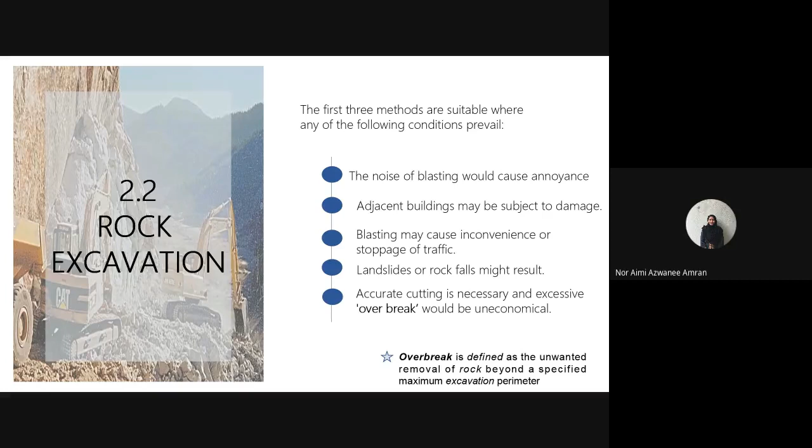So today we'll be continuing on the topic of earthworks. Inshallah, this will be the second part of the presentation. However, as I mentioned earlier, the slides here are not really up to my liking because they tend to oversimplify things. However, I will try to explain to you the best that I can in regards to the topics.

So that's why when you are studying for your examination, assessment and whatnot, you do not want to be reading the lecturer's PowerPoint presentation slides, okay? Because you will be missing out on a lot of the important points in regard to that topic. So you should read the proper text, proper literature, and then simplify it in your own notes, okay? But usually the PowerPoint slide is more of a guide for lecturers to present the topics.

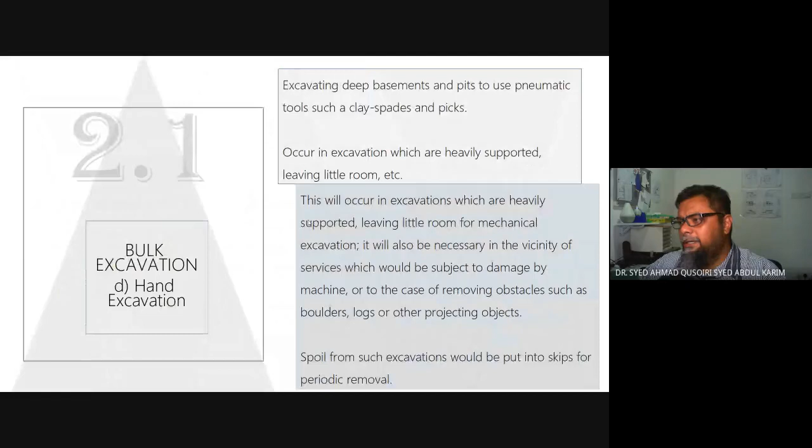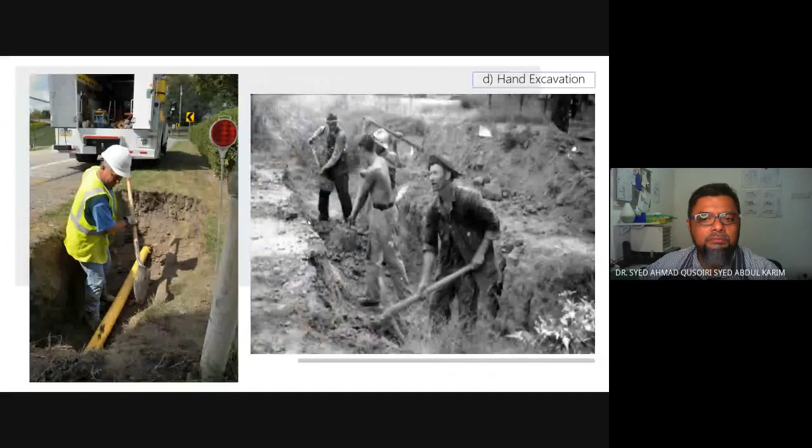Okay, if you refer to the previous slide, previously we have covered bulk excavation, a bit on basements, so a lot in terms of proper soil, but today we'll be looking more at rock excavation. Okay, so as we know, when we start digging into the earth, we come across three main components. We have the solids, the liquids, and also gases or air. Now, in terms of solids, the things that we might discover are usually various types of soil and also rocks.

Okay, so when it involves rocks, the methodology that we need to take in terms of removing those rocks can be quite different, because it takes a lot more effort to remove rocks compared to soil. And that's why when we are doing construction, we need to do the soil investigation to identify the location and volume of these rocks. Because the methodology is different, and where QSs are concerned, the rate of payment or the pricing is also different.

So basically, if you did your soil investigation improperly, then when the contractor starts to dig and they find out there is a mass amount of rocks underground, it's like the contractor found a gold mine. You can imagine the sum of VOs that the contractor is going to claim. Yeah? So that's why as a QS we must be alert to this type of thing, especially when it involves cost, increase of cost.

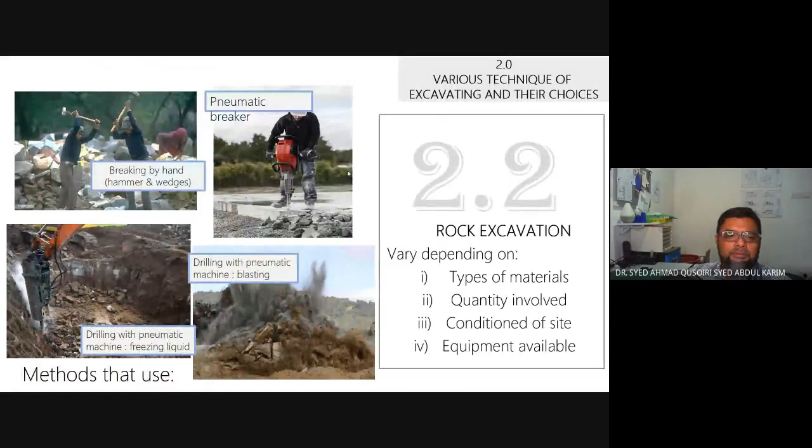All right, next, this is how the techniques are being selected. Okay. So the first three methods are suitable where any of the following conditions prevail. Which three methods? Manual, using breaker, using power tool, and using freezing liquid, using chemicals. Yeah.

Basically, we can use that in populated areas. The fourth is not allowed to be used in populated areas. Adjacent buildings may be subject to damage, blasting may cause inconvenience, landslide, and overbreak. These are the risks that can happen if you use the blasting method.

Which leaves us to wonder how the blasting contractors overseas are so very skilled. They can even design the blasting pattern so that the building will fall a certain way. Not just falling left or right, but if it's supposed to fall on itself, to implode, there is also a blasting pattern they can design for that.

Landslide and rockfall. So when you use blasting, there's a risk of landslide, because of the vibration that you generate. And believe me, it is quite strong. At my site, they wanted to do the first blast. However, the subcon did not call upon the main con when they started to blast. And the shock wave and the vibration were so strong that our container cabin really shook.

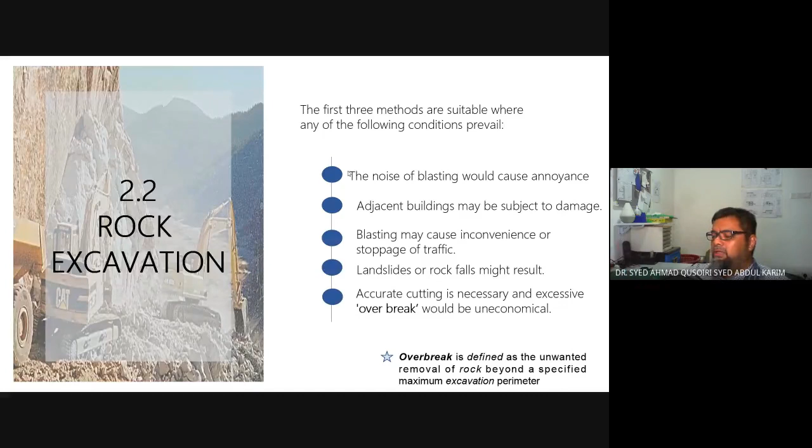So the shock wave is one thing, and then you would have debris falling, and also the risk of landslide. So it's very dangerous. A nightmare for our safety officer there. And also overbreaking will be uneconomical. You do not want to break the rock face into too-small rocks, because it will be difficult to move them. It will take a long time to cut them away. Okay.

All right, so now we have modern methods: basically we are doing blasting on a more miniature scale and very precise blasting. So that is a new method. That's how they are able to take down buildings in the middle of a city without damaging people around them that much.

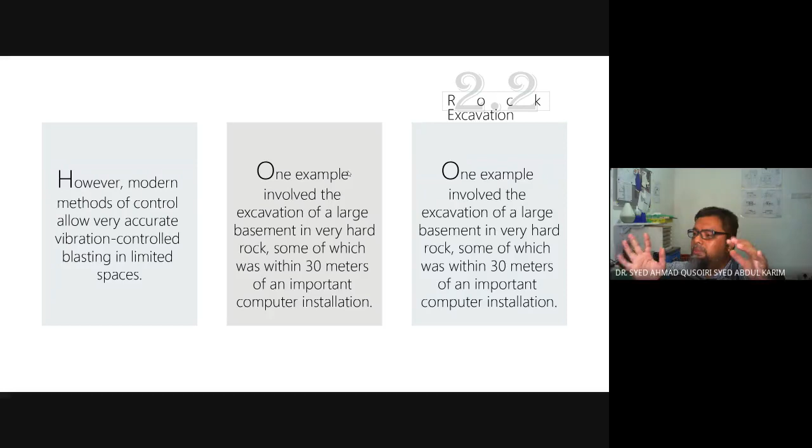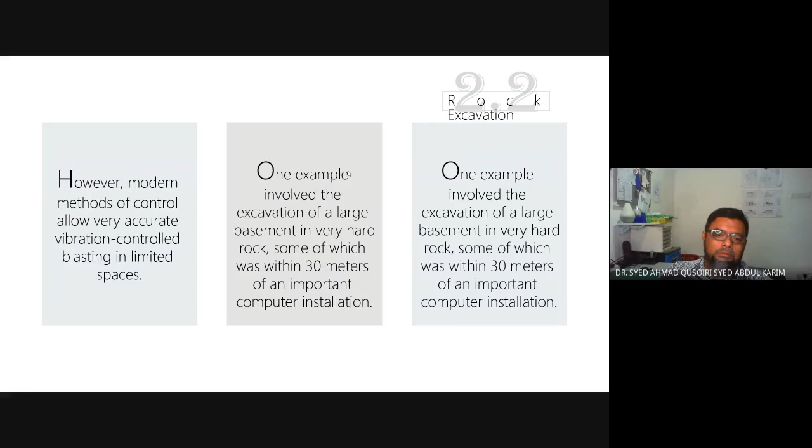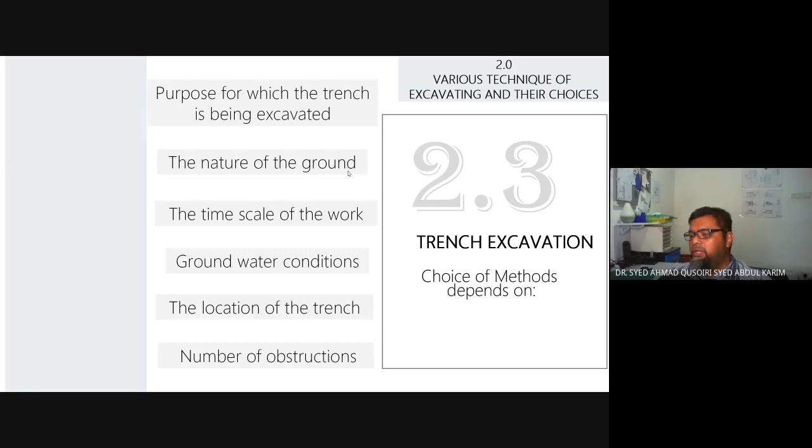Then, of course, groundwater condition, especially when you're digging for drains. The location of the trench, side of the road, under the road, different techniques, and the obstructions, obviously. Going through rivers, large drains, going under roads.

So three techniques of digging a trench: full depth, full length. This is when your trench is not that deep and it is not that long, normally for building works. So you can just start to excavate to the platform level and you excavate the entire length. Okay, simple.

Next is full depth successive stages. So your trench is not that deep, but it's very long. If you just rely on one contractor to do the entire trench excavation, it would take a long time. So normally, especially in civil engineering construction, they would divide those lengths into packages: package A, package B, package C. Each of the packages will have a dedicated contractor. By doing that, we can ensure the trench excavation will be completed earlier. More people working on the project.

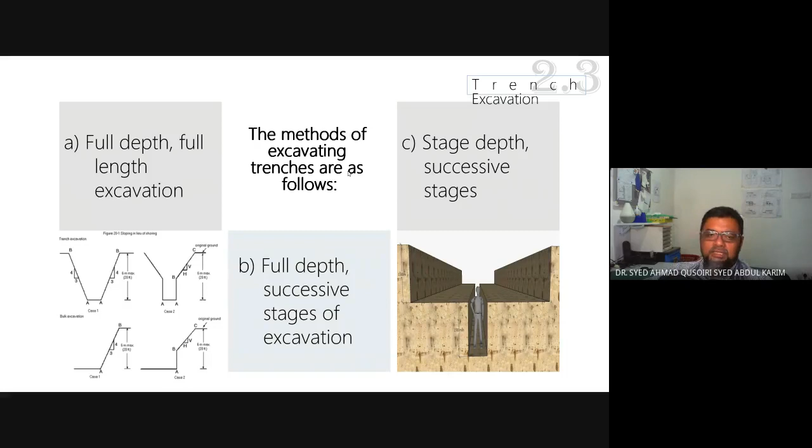And the third one is the most difficult: stage depth successive stages. Meaning your trench is deep and very long. When that happens, you have to excavate in stages. You excavate to a certain depth, and then you put your support. Once your ground support is in order, you excavate some more, put the next level of ground support, until you reach the platform level that you require.

And on top of that, you need to do that in stages. Again, there are packages A, B, C. So all of them need to do the same thing, digging in stage depth. This is usually near the end of the drain's run. The downstream section is usually deep. Yeah.

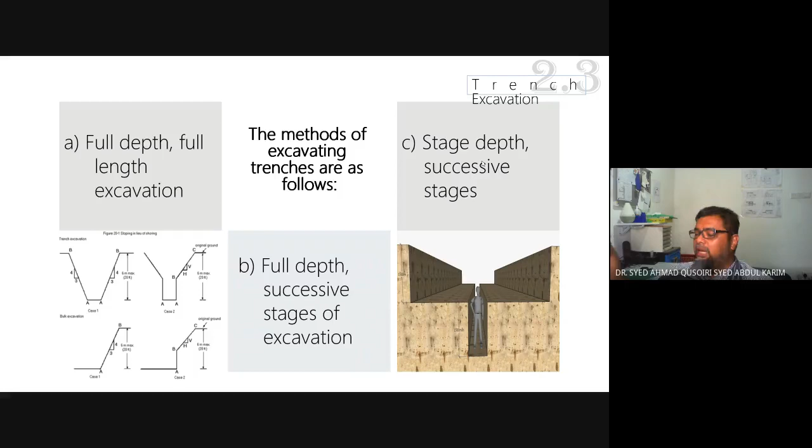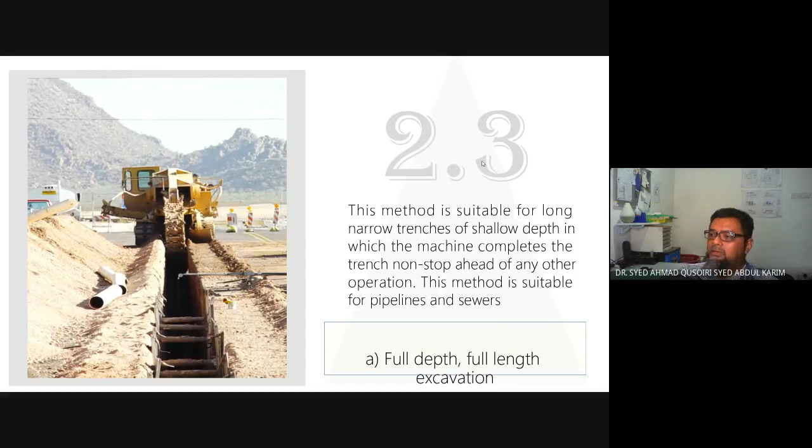So this method is suitable for long narrow trenches, shallow depth. Suitable for pipelines. This one I have explained. So this is full depth, full length. They use this trench machine. It will make your work a lot faster. And then full depth successive stages. Why do we want the work to be completed as soon as possible?

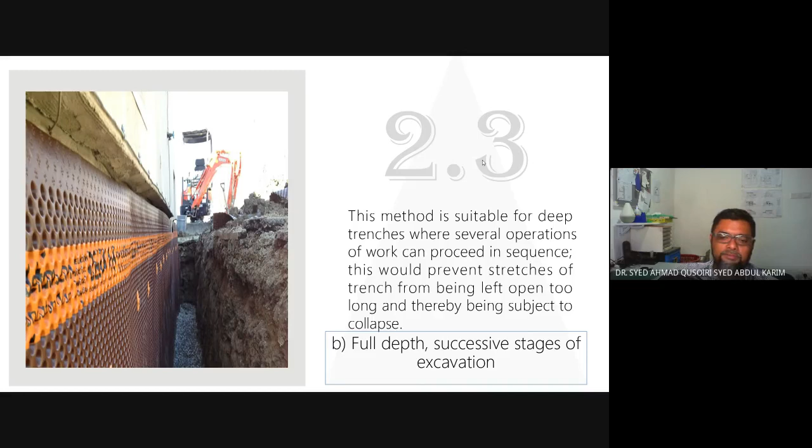Obviously, even if they have put in all the support for the excavation, when the rain comes, not just because of the change of weather, but the season, the rainy season comes in, the soil will be saturated with water. So it will make the soil a lot heavier and a lot more easy for it to move around. That's why when the rainy season comes, we can see landslides.

Tanah runtuh dan sebagainya (landslides and so on). What makes the soil begin to slide is not just because of the soil itself, it's because of the water inside the soil due to the rainy season.

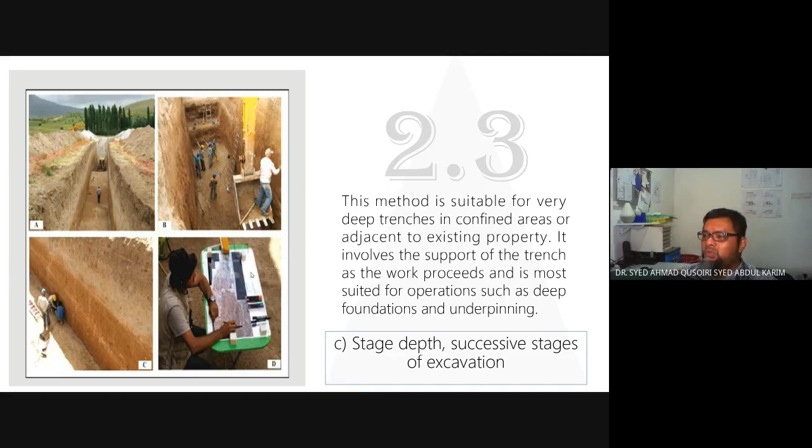So you have to remember the danger of doing earthworks during the rainy or monsoon season. Here in Malaysia, when we see a very heavy rain, we call it hujan, it's rain. But it's not actually just rain - if you go overseas, when they talk about rain, it's just a very light droplet of water. What happens in Malaysia, especially when it's very heavy rain, they call it a monsoon rain, basically hujan yang sangat-sangat lebat (extremely heavy rain). So especially in Malaysia, we have to watch out for the monsoon season when doing earthworks.

Okay, so next, the type of support for excavation. Obviously we can't dig very deep without putting in the right type of support. So support of excavation depends on the type of soil, groundwater condition, and depth and width of excavation.

Even the type of soil, we have clay soil, silty soil, sandy soil. If you go into depth learning about earthworks, you will come across these different types of soil. Each of them requires different types of support.

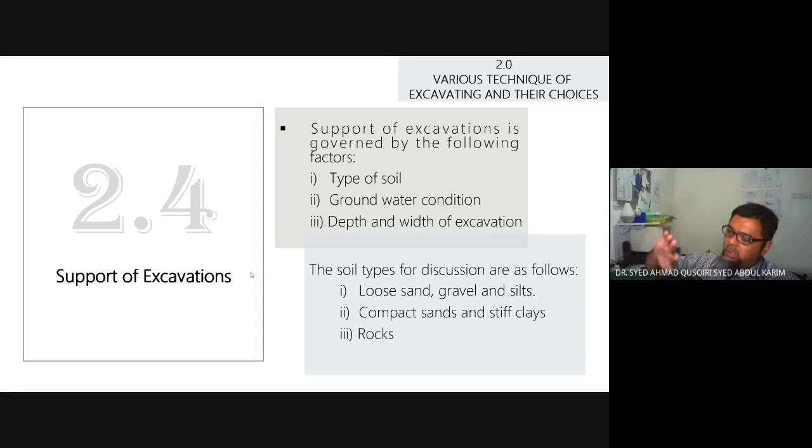If you are to talk about mud or silty soil, when putting support, we cannot have the planks away from each other. So the board or the planks need to be close - we don't want the silt to come into the excavation, we try to keep it as minimum as possible. Whereas if you have a very strong wall for the excavation, the boards can be further apart from each other.

But that is in the dry season. When it's the wet season, it's an entirely different issue. Groundwater condition - we have to remember that water, especially groundwater, is the biggest enemy for earthworks because the water acts as a lubricant. It allows the soil particles to move around a lot easier. That's why tanah (soil), if we put water, it will lose its load-bearing capacity.

So that's the danger there - presence of water during excavation. And obviously, the wider and deeper you excavate, the more support that you need.

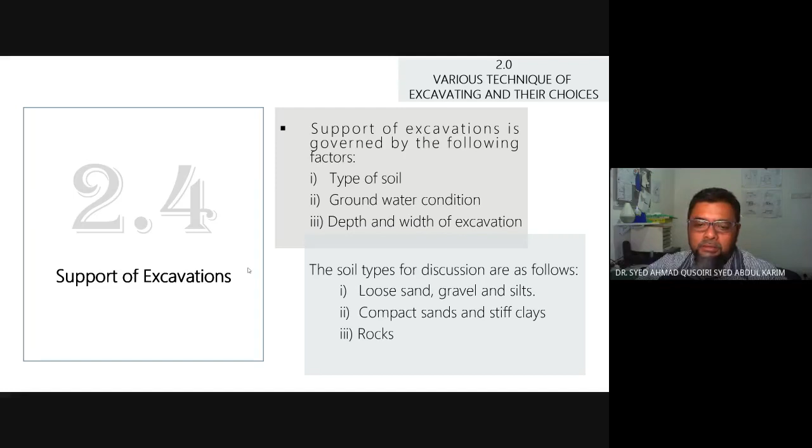So even for type of soil, we have three types: loose sand, gravel, and silt; compact sand and stiff clays; and rocks. So for loose sand, gravel, and silts, these are types of soil which are very loose.

So we need trench sheeting, lightweight pressed steel sheets, or to make it simple, install sheet pile. That's it, end of story. That's the best that you can do for temporary support. This type of soil is likely to slump quickly.

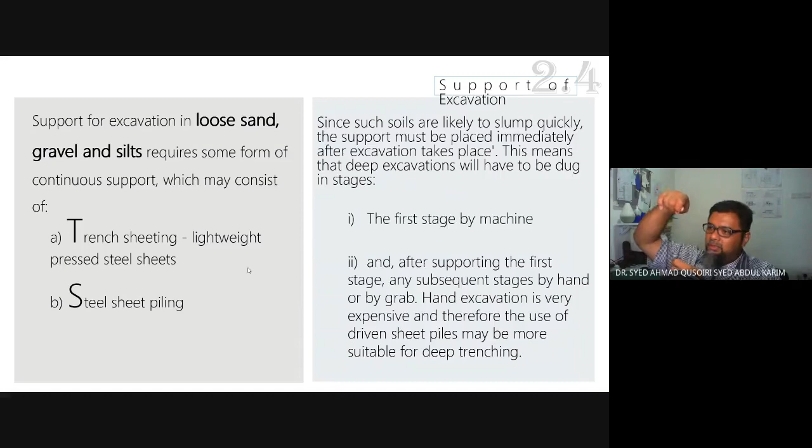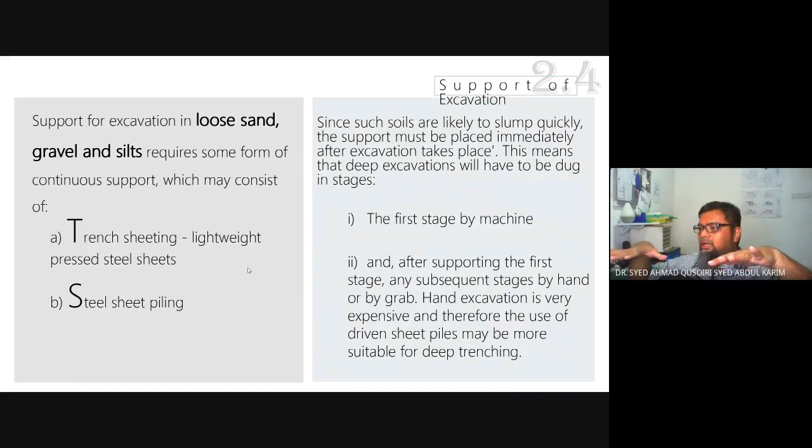Slump test ni biasa kita buat pada konkrit. We mix the concrete up and then kita masukkan dalam bekas tu. Dan kita terbalikkan dia, dan kita angkat. And then kita measure berapa tinggi konkrit tu. So if the concrete slumps easily, maksudnya bila kita angkat acuan tu, konkrit dalam tu semua jatuh ke bawah. Kalau it doesn't slump that easily, maksudnya konkrit tu will still maintain dia punya shape.

So for soil, soils that slump quickly ni maksudnya tanah yang mempunyai keupayaan galas beban yang rendah. So this type of soil yang basically mudah runtuh lah. The support must be placed immediately after excavation takes place. Sometimes before they excavate pun dia dah letak support tu, contoh macam sheet pile. They drive the sheet pile underground, masuk, baru dia korek, because of the risk of the soil yang mudah untuk runtuh.

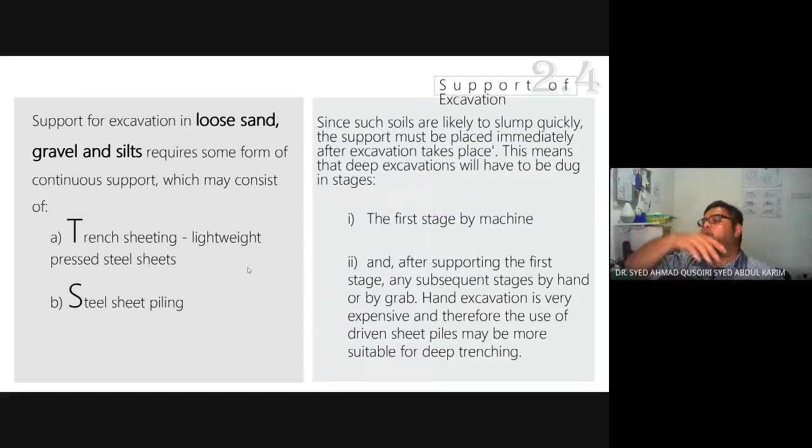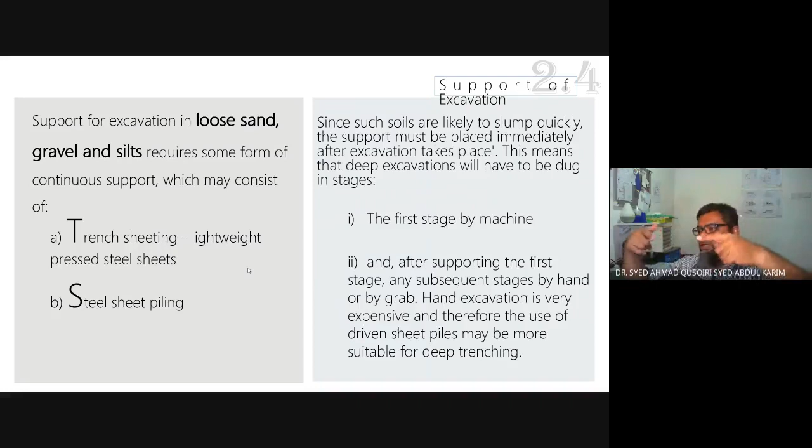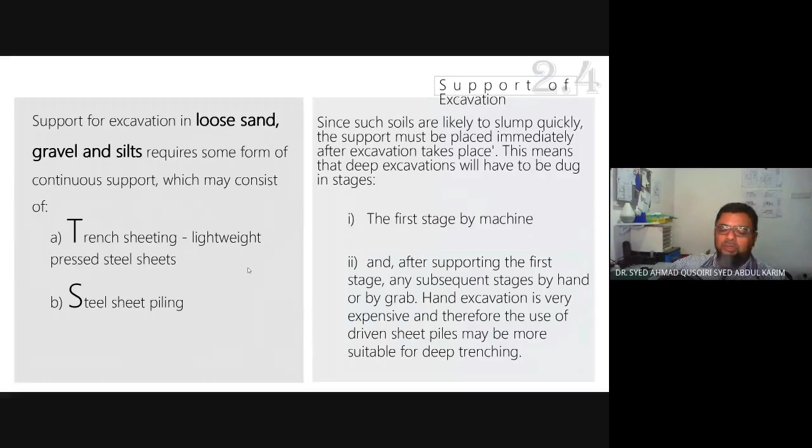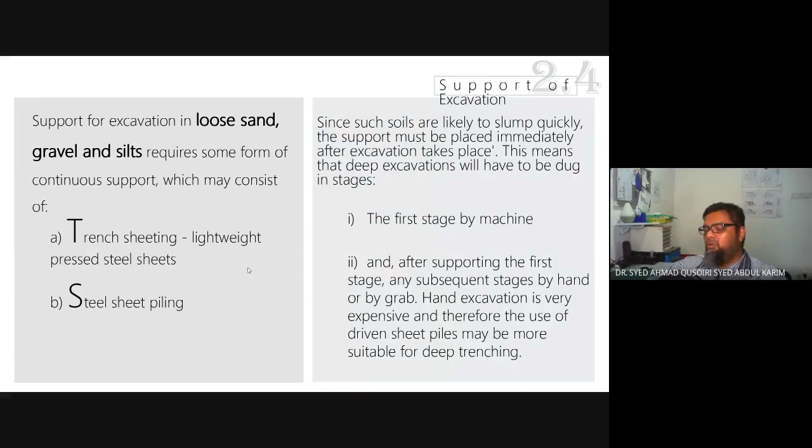So this means that the deep excavation will have to be dug in stages. The first level of excavation normally will be done by machine, because there are no obstacle from the support. But when you excavate to the second stage, you have all the support lah, you punya bracing here, there, macam-macam, you punya excavator punya boom tak boleh nak masuk untuk excavate, takut kena support tu boleh runtuh. So normally the next stages that goes even deeper, they would resort to the use of miniature machine, excavator yang comel-comel kecil tu, or they would use labor lah, kaedah manual.

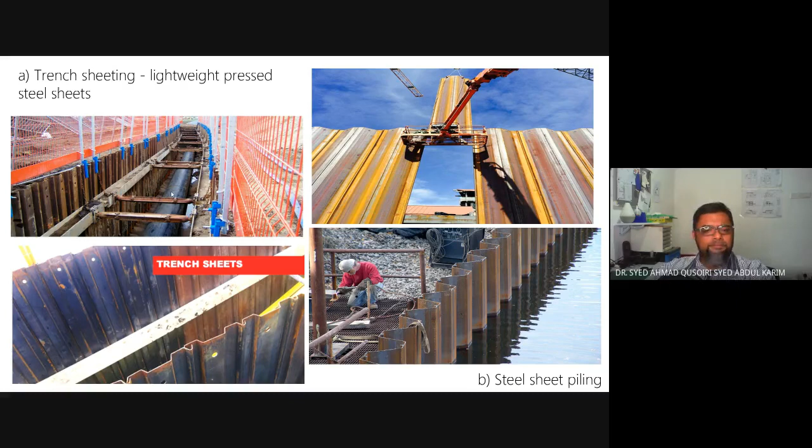Sebab benda ni pun temporary structure je, dan kalau you tak digging that deep, tak payahlah nak pakai sheet pile kan. You kan besok kerja kat site ke, tengok you punya site nak korek longkang ke, you pergi order sheet pile satu trailer, pengsan lah bos you okay.

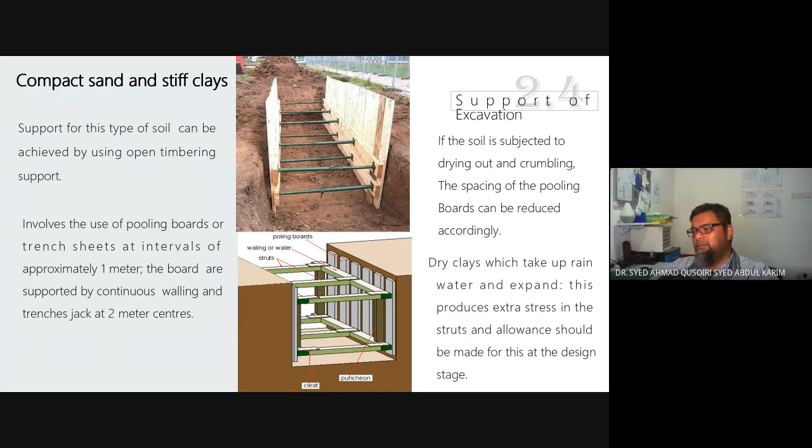Ini pun dah memadai. You can see that the pooling boards here is close to each other. But if the soil is really strong, you can even put a bit of distance between those pooling boards. But you have to remember this is during the dry season. When the wet season comes, this pooling board will become obsolete, so you better make sure. That's why usually earthworks they would put the job to be done during the dry season, so before the wet season comes, the job is completed.

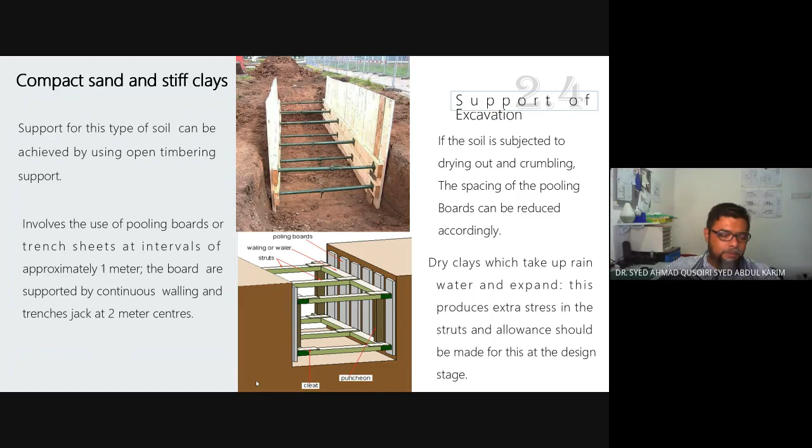So what about rocks? Do you put pooling boards too, or sheet pile? Sheet pile pun tak boleh tembus because it's rock face. So for rock face, they would resort to the use of rock bolts. Namanya rock bolts.

For those who have done a bit of DIY kat rumah tu, it's the same concept as the wall plug. Saya pun pernah pasang wall plug besi tu, you nak gantung apa kat dinding, macam nak gantung TV ke apa kat dinding tu, you will use this metal punya wall plug kan. You drill hole to the wall, you masukkan you punya wall plug, pasang you punya equipment and then you ikat. What happens is that when you tie up that wall plug, it will start to expand a metal sheet dalam tu to hold onto the wall, so that the wall plug will not move. Okay, so the same goes here, the concept is the same, only dia punya wall plug tu lagi panjang, lagi tinggi daripada kamu lah.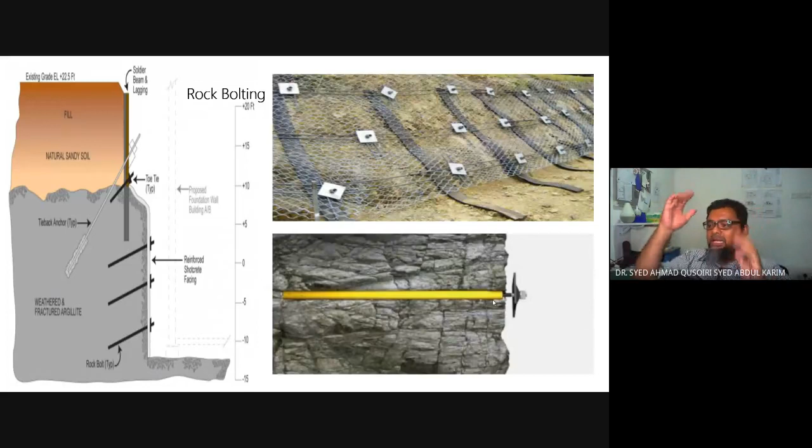If you go to Google and want to look about this, you type in rock bolts. Because the rock face is actually like a layer cake - it has layers. So we try to tie all the layers together so that it becomes one unit and becomes stable.

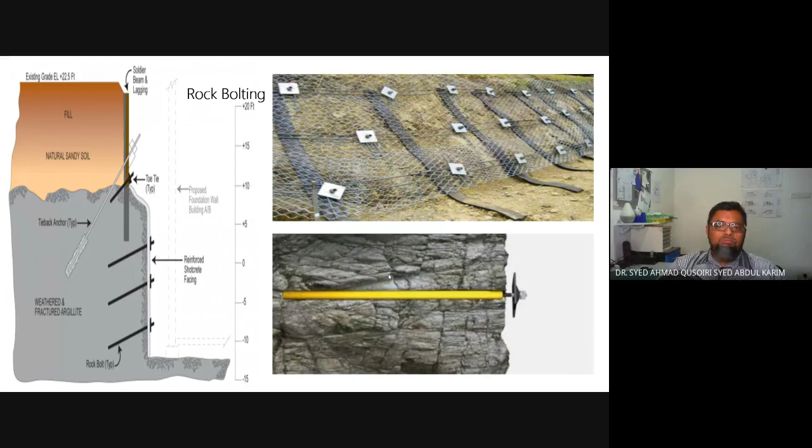Okay, next, embankment. A wide wall of earth or stone built to stop water from flooding an area, or to support a road or railway. So this is known as embankments. So how do we construct such a design feature?

The construction of embankment and the design profile of the sloping side will depend on a number of factors. Embankments, in simple terms, we can say is penambakan - it's the opposite of excavation. We call it cut and fill - cut is the excavation, filling is the construction of embankment.

As I said earlier, for excavation we can dig in one shot or dig in stages. But for construction of embankments, filling work has to be done in layers, layer by layer. Again, it has its process.

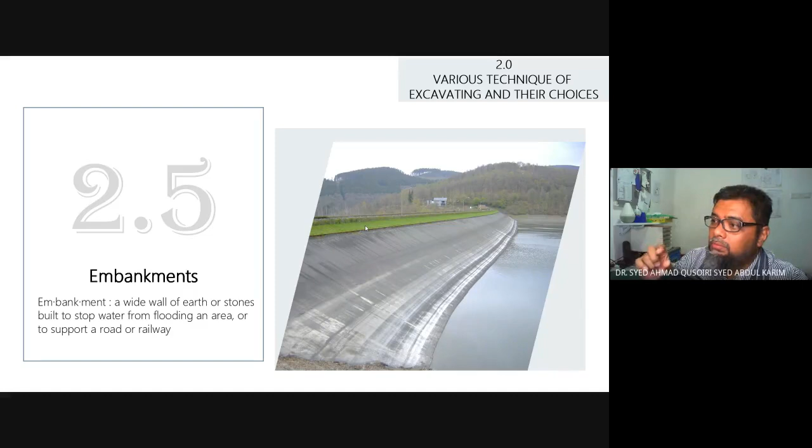First, we spread the soil - soil that has been approved by the engineer to be used as embankment material. We spread it across a certain length, then we compact it, and then we test it. Once it passes the test, only then do we do the next layer.

The filling work cannot be done all at once, because for sure it will settle. That's why it needs to be done in layers and properly compacted so that we take out the air pockets inside the soil. Those air pockets are what actually cause the soil to settle - too much air in the soil.

So they have that cycle: spread material, compact, and then test it, called core sampling. Take the core, test it at the soil lab. Once it reaches the required density, the layer passes, and then move to the next layer. Repeat the process until you reach your platform level.

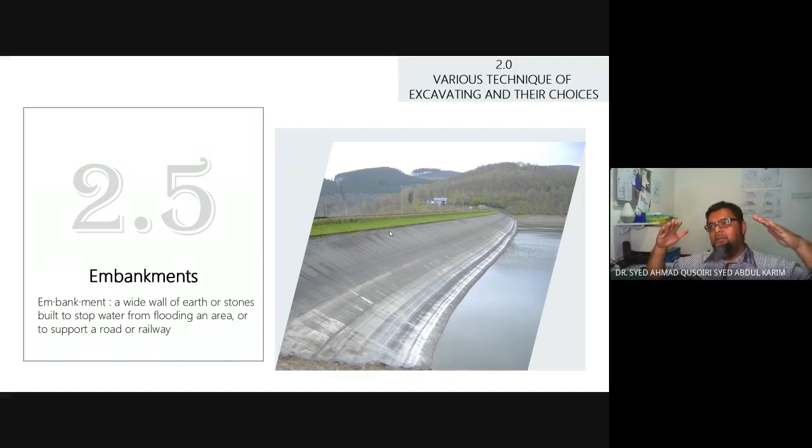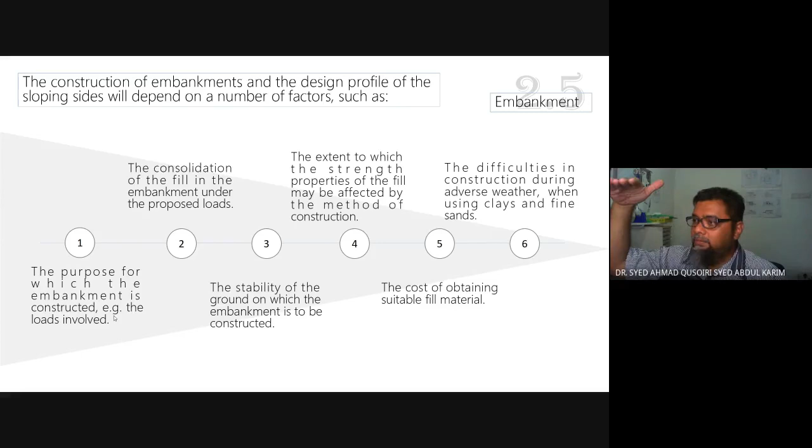So design profile will depend on the purpose for which the embankment is constructed, for example the loads involved. If we want to build a road, the original soil is quite low, we want to raise it, we want to fill it up higher. Okay, that's fine, but what kind of traffic do you expect will pass through that embankment?

If it's just motorcycles and normal cars, it's okay to build a normal embankment. But if we talk about heavy trucks and things like that, the embankment needs to be constructed more carefully.

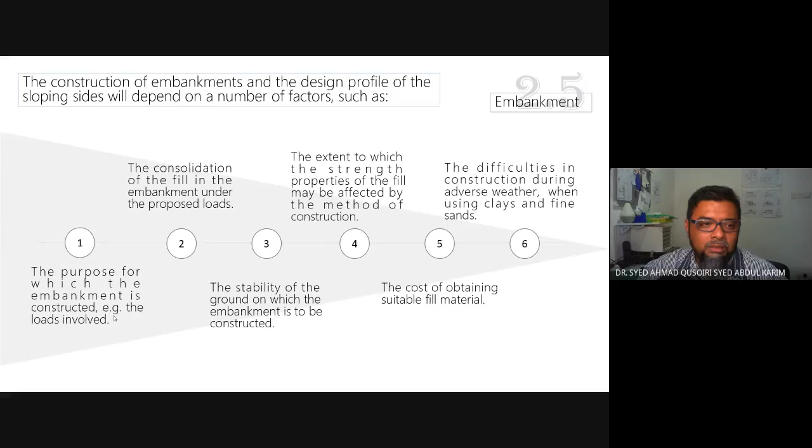Consolidation of the fill in the embankment under the proposed loads - consolidation means how packed the soil is. And if you check the specifications, especially for earthworks and embankment works, they will say the spread layer needs to be compacted by a certain type of compactor.

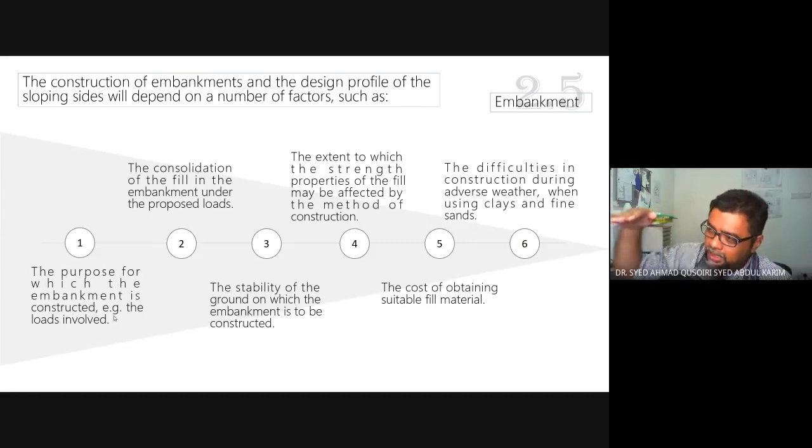The specification is for a certain number of passes - meaning the compactor or bulldozer has to go through a certain number of times, back and forth, say 8 passes. So the compactor will pass once, twice, three times, four times up to 8 times, meaning the layer has been compacted according to specification.

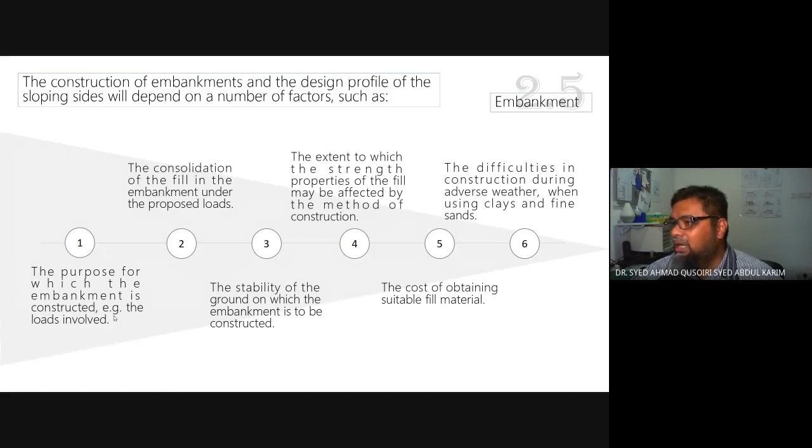Okay. Cost of obtaining suitable fill material, ni pun satu hal. When you don't have the soil, you have to import it from somewhere. There is extra cost. Unless you are using fill material yang tidak memenuhi spesifikasi. Okay. So kat sini dia punya site officer kena be alert lah. Kontraktor tidak menggunakan fill material yang telah diluluskan oleh site officer.

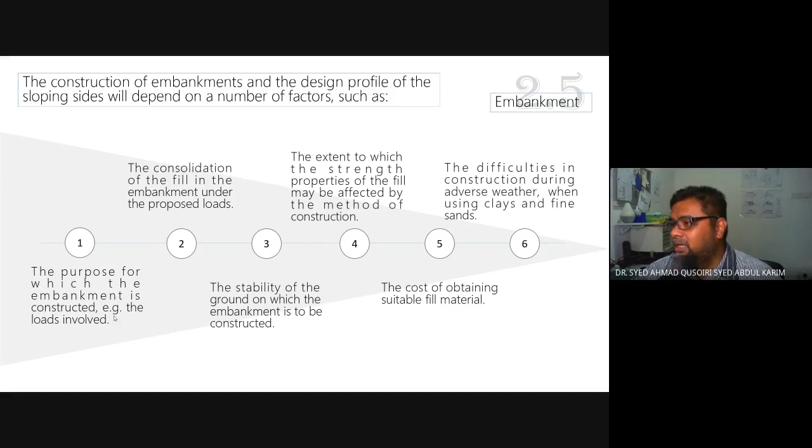So the method of constructing an embankment depends upon the extent of work, type of fill, and the nature of site. So this is, yang gambar ni is embankment works for the construction of earthfill dam. Okay. Tadi tu kita buat embankment untuk jalan raya je. Isunya tak berapa tinggi sangat. Tapi when you are doing embankments, especially earthfill dams, so you punya pemadatan tu kena betul-betul padat, kan? Kalau tidak, air boleh penetrate, boleh tembus you punya earth core ni, and then come out the other side. So sangat membahaya.

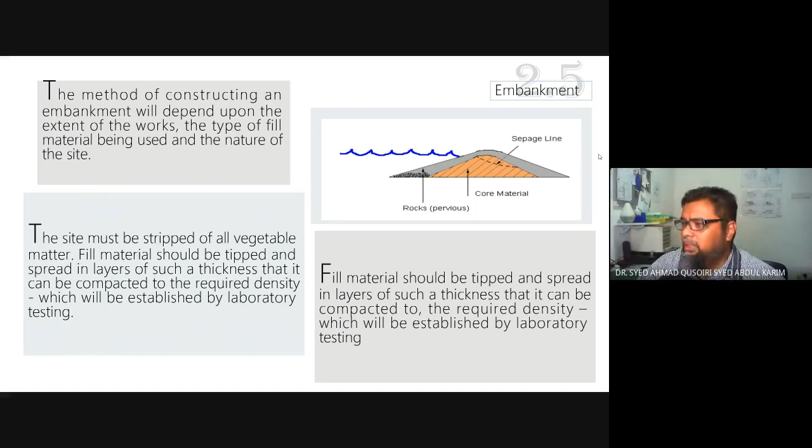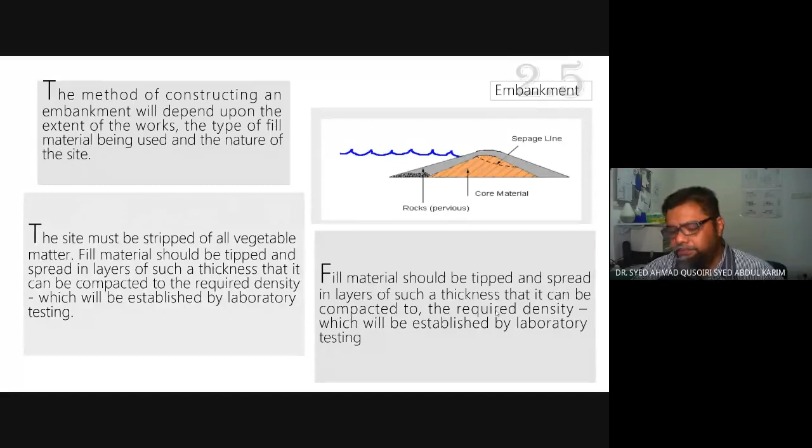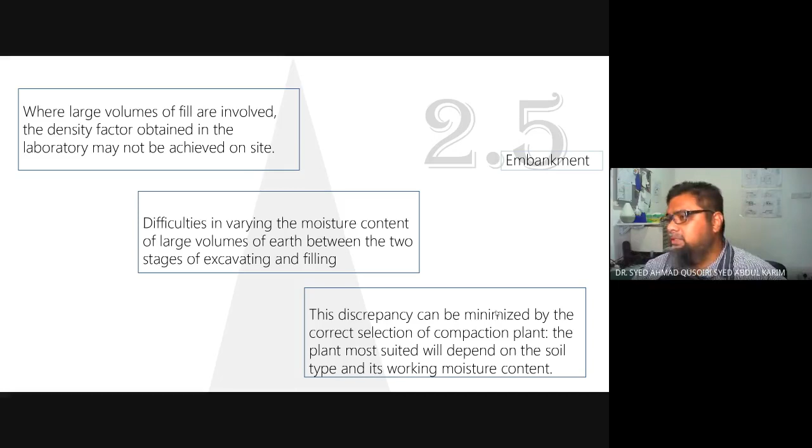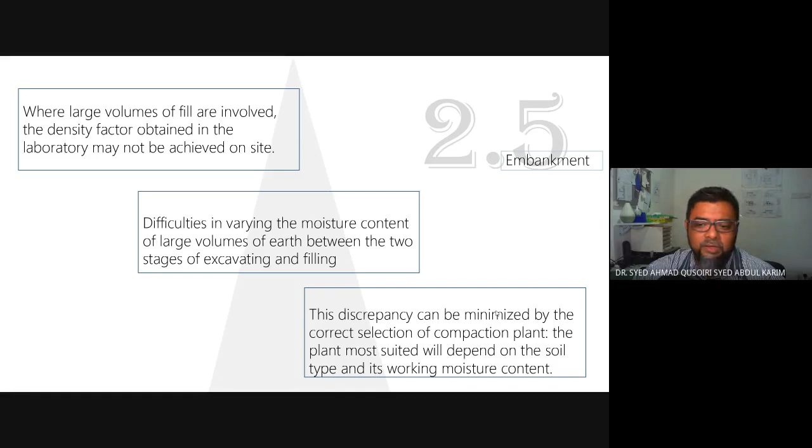Where large volumes of fill are involved, density factor obtained in the lab may not be achieved on site. Ini memang jenis, ini tak lulus kan ni. Meaning that the density that is supposed to be reached by, katakan tadi 8 passes of the compactor machine, kita tak mencapai kepadatan yang sepatutnya. So solution, lalu lagi lah buat more passes of the compactor machine sampai mencapai density yang sepatutnya. Okay. So discrepancy by the correct selection of compaction plant and soil type and moisture content. These are the variables that the engineer can manipulate untuk meningkatkan soil density lah. Okay.

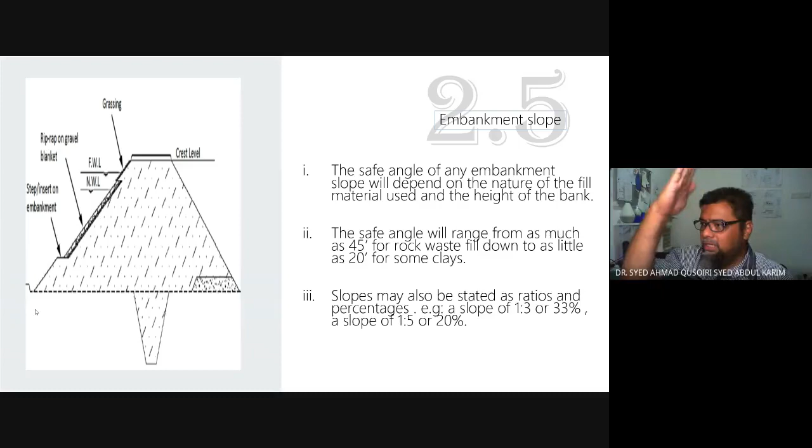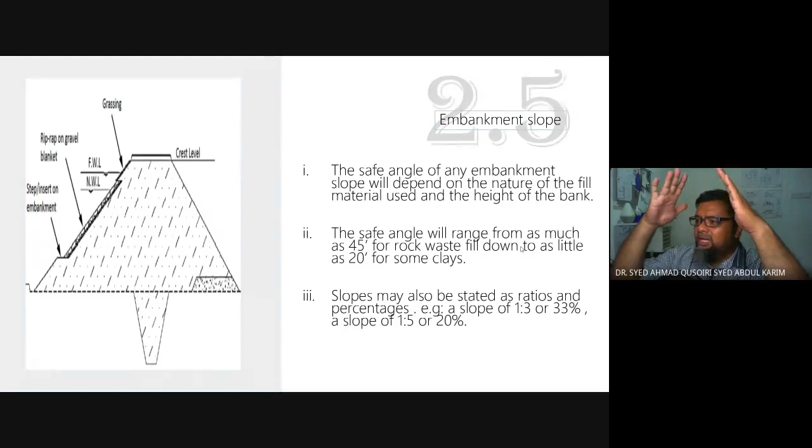Safe angle of any embankment slope will depend on, ni dia nak cerita tentang cerun ni lah ni. Okay. Slope ni. Berapa cerun, berapa angle yang kita nak gunakan, kan? That angle depends on the type of soil. Kalau soil tu slump quickly, maksudnya tanah tu mudah untuk runtuh, obviously angle dia akan jadi landai. This angle. Kita tak boleh buat dia tinggi, cerun dia terlalu curam. But if the soil is quite stable, we can create this slope at a much steeper angle. Kita boleh buat cerun tu lagi curam. So normally between 45 to 20 degrees. Kalau macam tanah pasir kan, macam mana you nak buat tinggi-tinggi kan? Obviously dia akan runtuh. So that one is about 30 degrees saja.

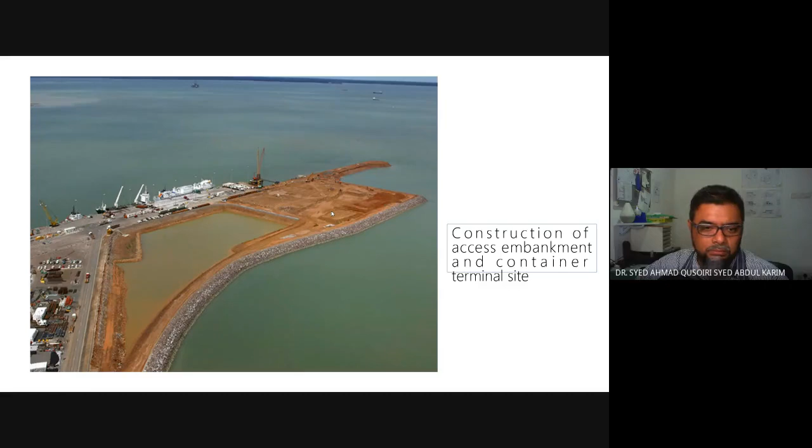Alright, so that's a bit on rock excavation, trench excavation, and embankments. So now you have the basic knowledge of those types of information. I would suggest you look online and try to find good videos or documentaries that will explain further about this topic. Okay. Sebab kalau kita belajar benda ni without looking at the actual thing, it won't stick. Yeah. Sekarang ni memang dah tak boleh pergi site. Tengok video je lah, kan? Dan tengok video lagi nampak. Alright.